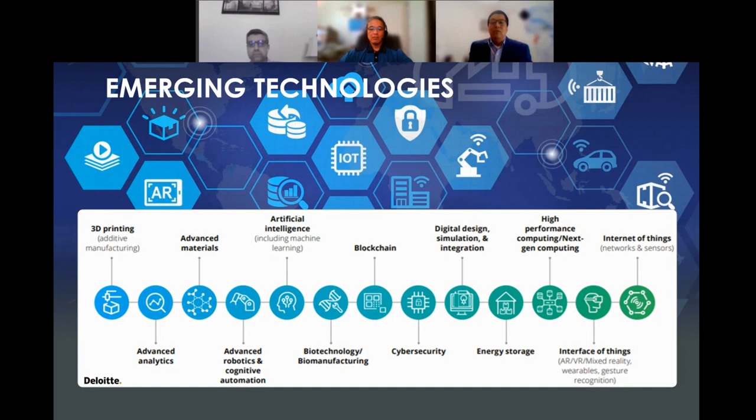This screen shows a recent report from Deloitte. The report speaks to the fact that new and emerging technology trends will change the industry. This is evidenced through many point solutions coming to market that focus on industry trends such as AI, IoT, or 3D printing.

These point tools have accelerated the use of some of the emerging technologies for design. However, they are point tools and remain disconnected from the design process, leading to data silos, broken processes, and lost data. But what if you could harness emerging technologies such as AI, IoT, AR, additive manufacturing, etc., within your existing design environment and tools?

Well, you can. At PTC, which is why I'm so excited to be here today, we are taking these latest technology trends and deeply integrating them into your design environment so that you, as a design engineer working in your everyday CAD tool, can use them freely. PTC is the world's innovator of commercial 3D CAD, and we are now leading a renaissance of industrial design by delivering these integrated technology trends in Creo.

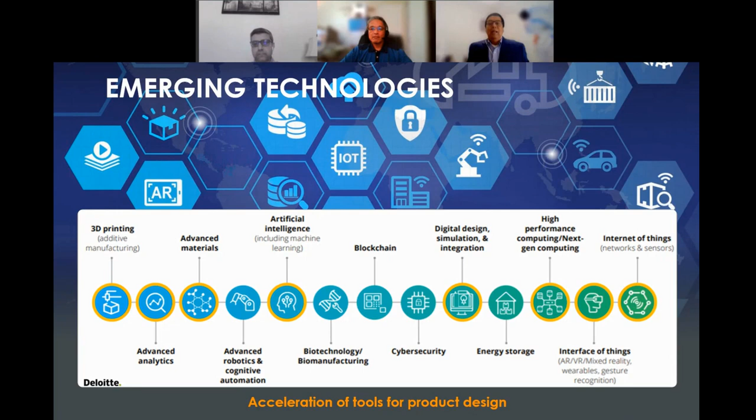Let me show you what I mean. At PTC, we're working on these 5 major areas, which happen to map very, very well to the major emerging technologies that Deloitte has outlined and that we know are critically important to you.

I want to point out 2 really key things. First, we are not introducing point solutions. We are implementing and improving these areas directly into Creo. They will be integrated and be part of your existing workflow.

Secondly, Creo scales across the supply chain. We can provide this technology not only to the manufacturer of an exhaust system, for instance, or any T1 or T2 supplier, but also to the major OEMs themselves. Creo is unique in its demonstrated market success in handling that kind of scale. Creo is the only industrial design tool capable of scaling and supporting at this level.

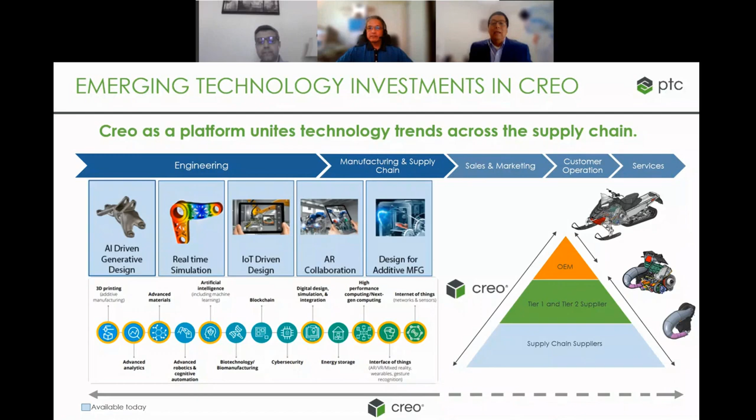And we're taking it to the next level by augmenting the already robust functionality with the integration of this new technology. So let's go one by one.

Taking a look at generative design. Generative design automatically generates optimal designs from a set of system design requirements. It brings together advanced analytics, artificial intelligence, and multi-physics simulation to automatically evaluate and evolve numerous manufacturing-ready design combinations that meet the design objectives, whether that is for additive manufacturing, milling, forging, or mold. Generative design will help challenge assumptions and deliver high-quality, lower-cost, manufacturable solutions.

As we move across the workflow from generative design, we come to real-time simulation next with ANSYS. This enables not just powerful simulation to be conducted, but to be conducted as part of the design workflow. PTC is the only exclusive partner working with ANSYS that can bring this capability into the design environment. Everyone else has to utilize the same disconnected, siloed workflow where data handoffs are required, not with Creo and ANSYS.

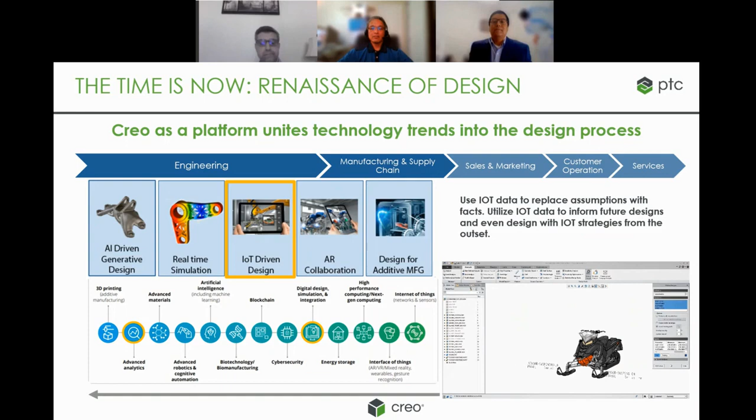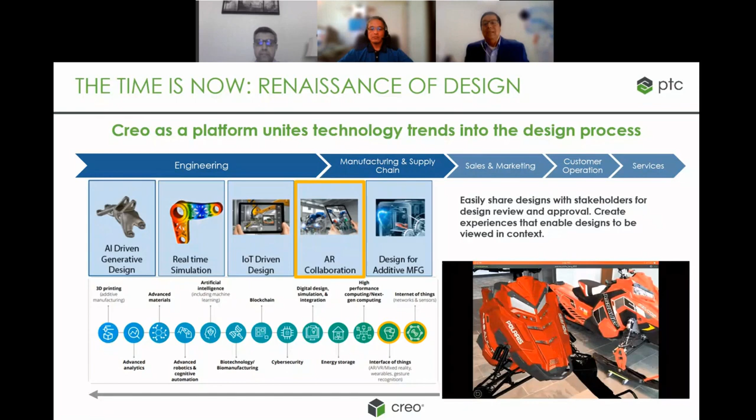Next is AR collaboration. With Creo, I'm able from within the design environment to quickly and easily produce AR experiences that enable stakeholders to not only visualize, but experience the design. You can easily share all your designs with stakeholders for design review and approval, creating experiences that enable designs to be viewed in context.

Creo as a platform also connects from engineering to manufacturing. Seamlessly design, optimize, validate, and run a print check all in one environment, enabling you to easily bring designs from a virtual product to a physical product. Now within Creo, you can create your tray assembly, place your parts or components, nest them, and send them to the 3D printer.

Now that we've covered the trends and how Creo is being improved, let's look at a very important enabler to design for manufacturability. Thank you, Jose.

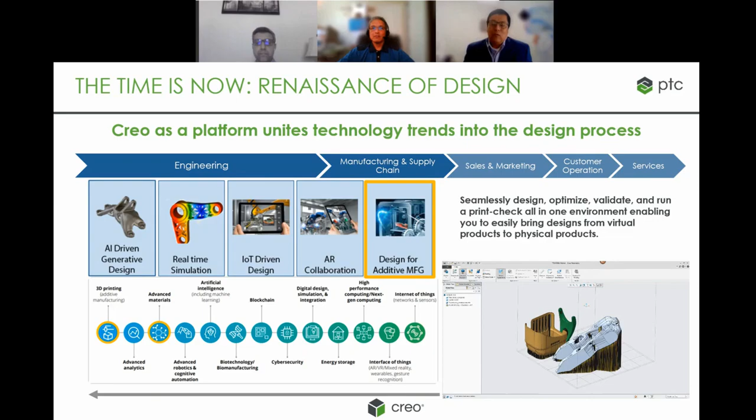I represent HCL. HCL is a world leader in engineering R&D services and solutions with over 150,000 employees and about close to $10 billion in revenues. It's a privilege for us to be the engineering partner of majority of the global top 100 product companies, representing almost all the major industry segments.

Our products and solutions help our customers in their digital transformation journey. You heard Jose talk about some of the trends in engineering, and one of the major implications of that is increase in product complexity. We see this challenge manifest across almost all our customers as global competition continues to intensify and the pressure to differentiate increases. Products are being made more and more smart and connected, and that continues to increase the complexity.

There was a survey done by engineering.com of leading manufacturers, and it came out that the number one reason products are becoming more complex is because the mechanical designs are getting more intricate. As miniaturization happens and as you pack in more electronics and software content into these products, eventually your mechanical designs need to be able to accommodate, and that increases the complexity.

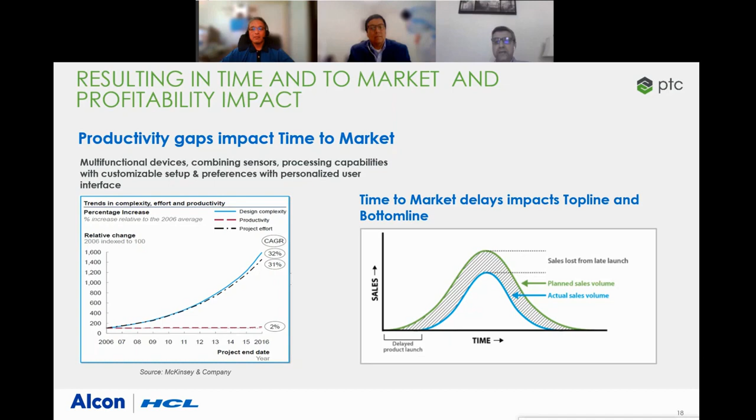To address this, design teams have to increase productivity and eliminate waste.

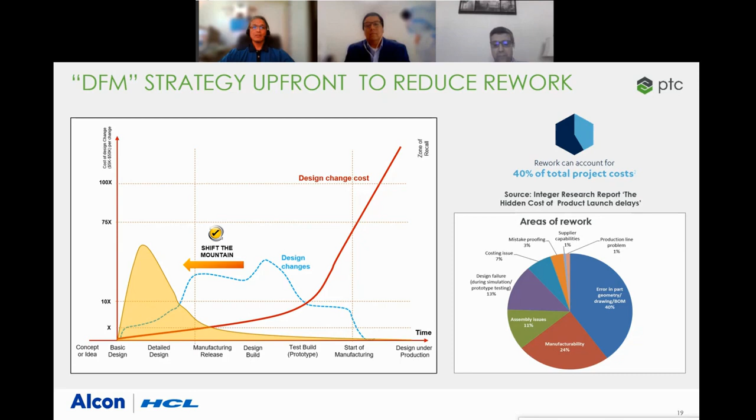Now, reworks themselves can be due to many different reasons. Our survey and research shows that typically about 35% of the rework can be due to manufacturability or assembly issues. That's basically design for manufacturability or assembly issues. And addressing them upfront during the design has tremendous benefits. Companies are realizing this, and they're adjusting their operational processes to handle many of the DFM, DFMA issues upfront.

Now, the traditional approach, though, which is usually manual, is fraught with challenges and is not very scalable. For one, since there are hundreds of checks in DFM, there's always a chance that some of the key checks may get missed out in the manual process. Secondly, there is no closed loop to capture the learnings from the rework systematically and incorporate them for future validations. And finally, in the new normal that we all live in, with more and more remote working, lack of proximity will be a challenge.

Therefore, the solution is a software-driven approach in an easy-to-use CAD integrated environment. You heard Jose talk about the need for a single integrated environment for handling the product development process. Now, the automated approach saves time, ensures that all key DFM checks are completed upfront. And since it's in your native Creo environment, it's easy for designers to learn and use. HCL's DFMPro software is proven across many industries and leveraged by designers as a digital assistant to help design with confidence and design right the first time.

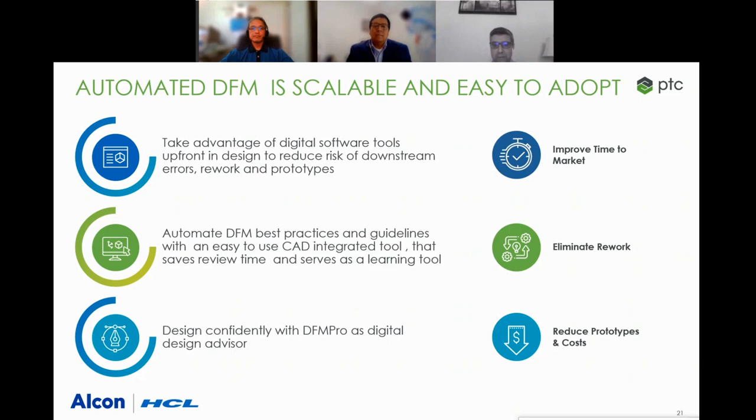With this, I'll hand it over to Alex. Alex is from Alcon, and he'll talk about how Alcon is leveraging Creo and DFMPro upfront during the design process and reaping the benefits. Over to you, Alex.

Thank you, Nambi. Before I jump into discussion about DFM, let me tell you a little bit about Alcon. At Alcon, we develop innovative products to help people see brilliantly. We are the largest eye care device company in the world. We work in 70 countries and serve patients in more than 140 countries.

Our leadership is driven by cutting-edge innovation and breakthrough technology, transforming the way we treat eye diseases and eye conditions. We have the widest array of eye care offerings in the industry, with products organized into two businesses, surgical and vision care. Driving innovation is the key to our business, and we have a history of launching new products to market for the first time, driven by strong R&D.

So when we talk about strong R&D, it also means keeping up with our own innovation. As a company, we share the same challenges for developing products as the rest of the industries, such as driving innovation to ensure product differentiation, contending with today's product complexities, meeting milestones, onboarding of new engineers, or just keeping up with the ever-changing regulatory landscape. To be at the cutting edge of product development, you need to have the right tools, people, and processes.

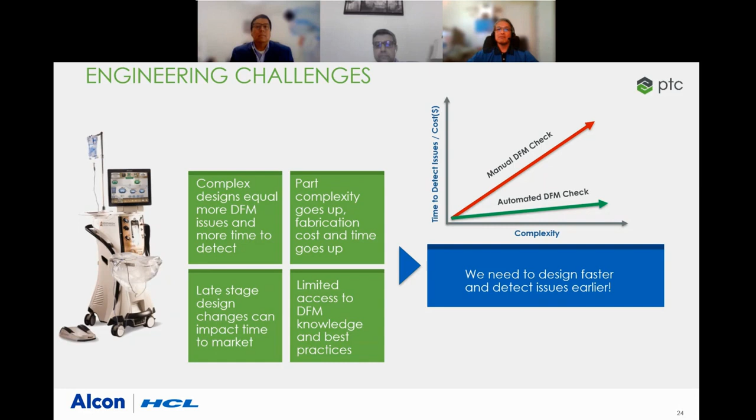But as Nambi points out, the traditional DFM approach has its own set of challenges. Manual reviews are very time-consuming. There's a lack of knowledge and best practices available, and it's often difficult to locate these company DFM guidelines if they even exist. But what would it mean to have a design advisor recommend fixes based on your company's guidelines while you design? But let's first answer the question, why is DFM critical and why do we even care?

Well, what about cost? Reducing cost without reducing performance. For example, minimizing part count, standardizing parts and materials, designing parts for loose tolerances, creating modular assemblies, streamlining the number of operations in the manufacturing process. As you know, the cost of engineering change is exorbitant during production, which may lead to rework, which may lead to delays. And delayed product launches have a direct impact on revenue and bottom line, including loss of market share.

And knowing supplier capability and ease of manufacturing ensures good part quality that is easy to manufacture at a competitive price. Tolerances impact cost for manufacturing, and DFM highlights the risk of using such impossible to achieve tolerances for the manufacturing process. What about safety and efficacy? We must consider selecting materials for cleaning agents, fire retardants, and even water ingress. So, as you can see in the graph to the right, the time to incorporate these DFM measures manually is significantly higher as time goes on.

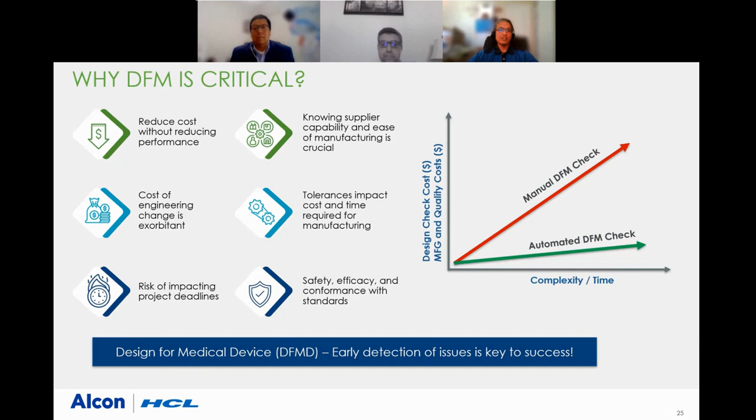But if we can automate this check process while we are designing, we could drastically reduce time and cost while increasing quality and getting it right the very first time. So how can we automate the DFM check process with our Creo platform? The answer is DFMPro, an add-on Creo application for manufacturing. So let's go see how this is done.

Also, as you can see, we use Creo as our design platform. It allows us to visualize the final product before steel is even cut. It allows us to create virtual parts and assemblies that make up the subsystem within our product, communicates design requirements to cross-functional design teams that all can see, and provides the capabilities and design tools to support all cross-functional design teams. DFMPro is an add-on that is directly integrated inside PTC Creo Parametric, adding manufacturability to our design platform.

And with just a few clicks of a button, when we are designing, it activates the Design Advisor. It's also linked to Windchill for DFM traceability. It also helps stage models for more expensive analysis like mold flow simulation, or even helps start conversations with your vendors at the beginning of your project.

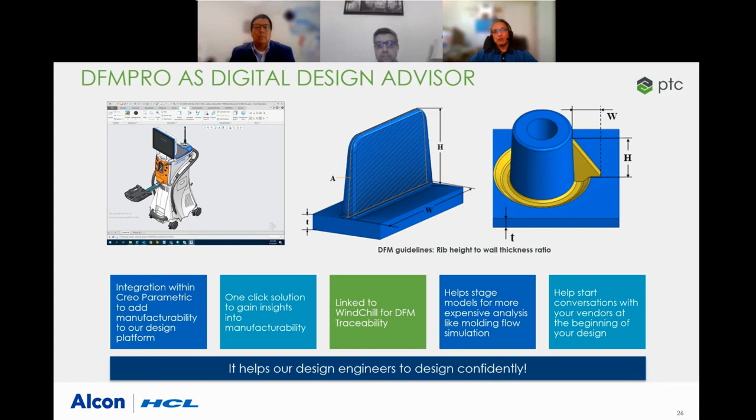Now, let me show you how we use it with an example. So open a part in Creo. Here's a plastic part, and Design Advisor is activated to provide recommendations while you model. Just input the parameters and go. We have an option to analyze the part after modeling is complete, where we select the company guideline for this material, fabrication process, and click OK.

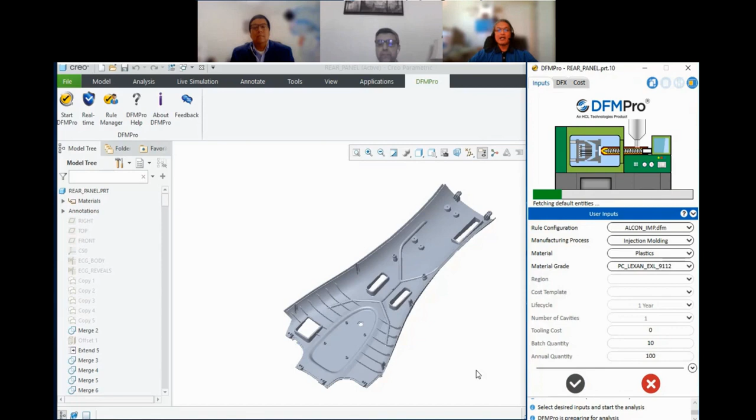Design Advisor will now select the pull direction, and all we need to do is input the material wall thickness desired and click OK. DFMPro is now comparing the part against each company's DFM guidelines for plastics, as you can see here. What is nice is now company guidelines are available for all design engineers, regardless of location, and now company guidelines can be updated in real time.

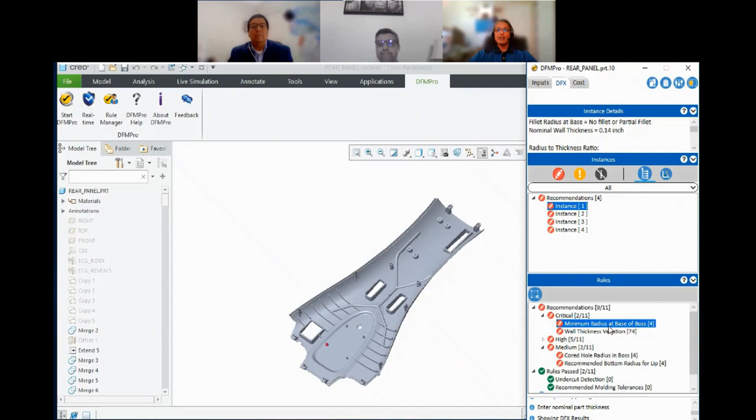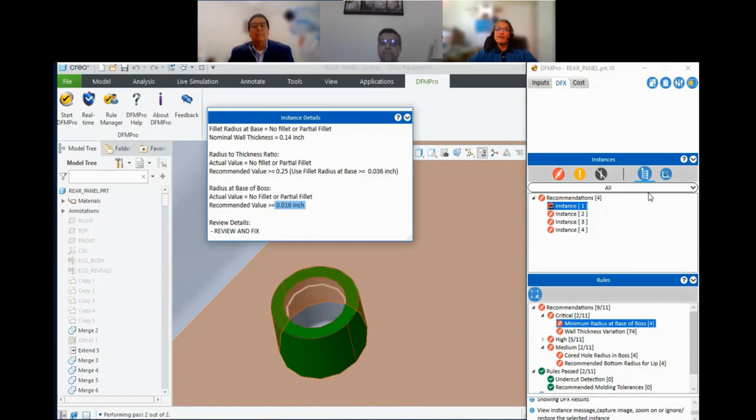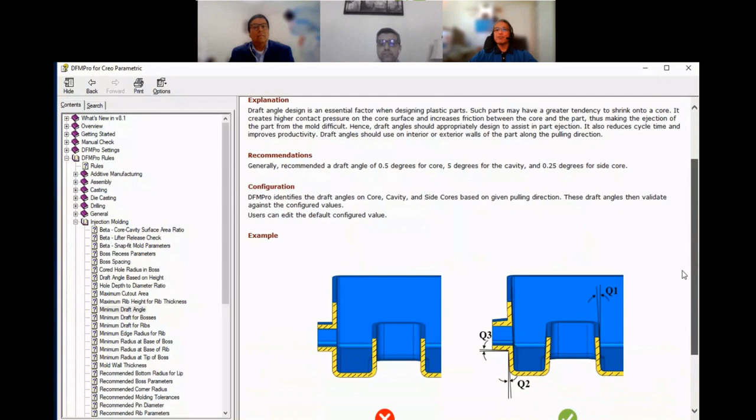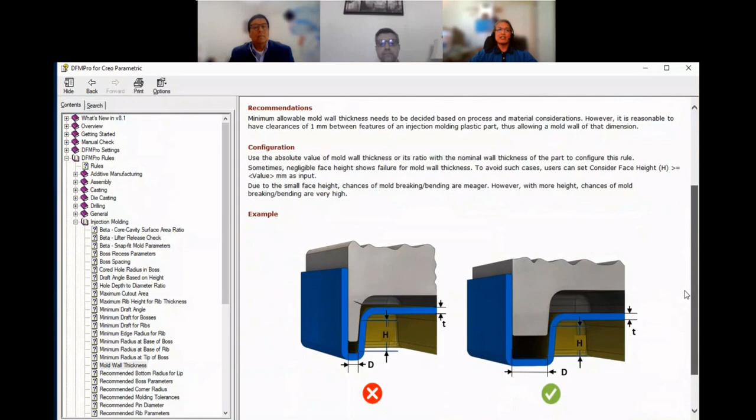DFMPro also has a help menu that directs you to the content to give you further explanation on this specific rule and examples. Here are a few other rules, like minimum radius at tip of boss with examples, or minimum draft angle with an explanation why draft is important and the recommended parameters for core, cavity, and side core classifications, or wall thickness where two walls are too close, resulting in thin wall conditions that can affect the quality of the part and reduce the life of the tool.

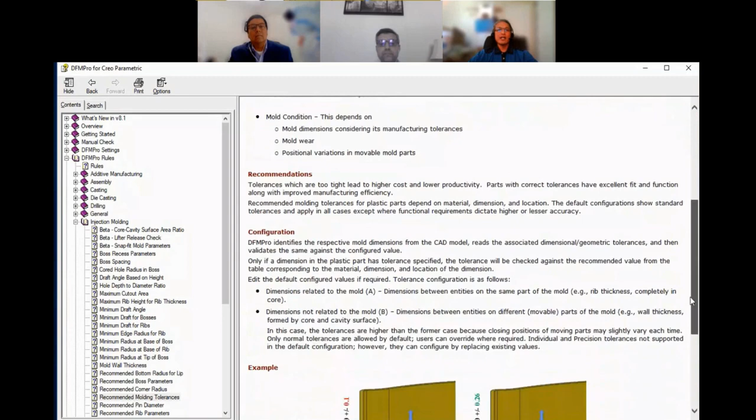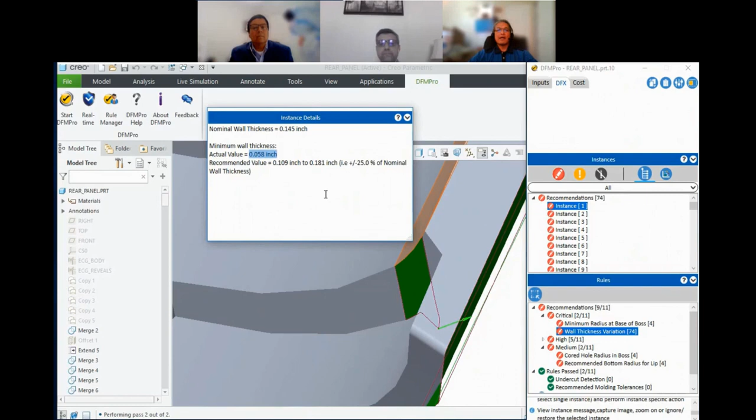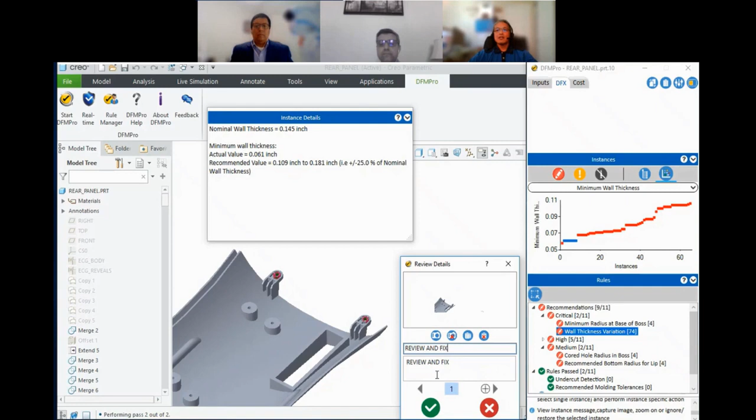I can also go to the scatter option and select multiple areas for analysis, and the Design Advisor highlights all these areas in Creo, which now allows us to add comments for the same issues all at once, saving us time. And now that we are done analyzing the results, we can go and create a report that will include all the recommendations and all the comments that have been inputted. Select the reports and click OK.

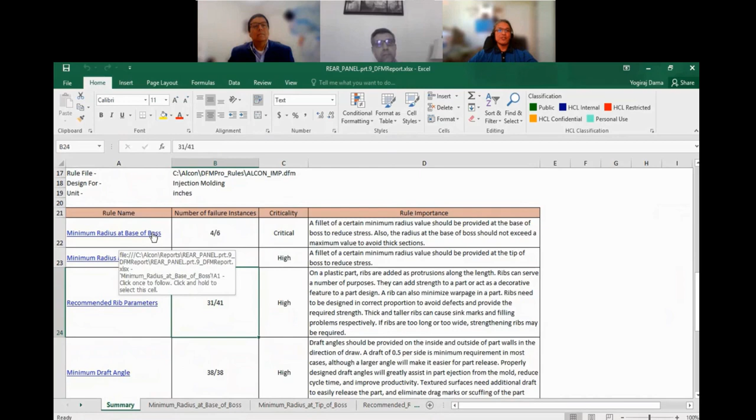Here is the Excel report with the company logo and list of rules analyzed. Let's pick one of these guidelines on this report, and we can see the recommendations for the guidelines, the actual values versus the recommended values, the comments we inputted during the analysis, including the associated image for these comments. We even have a section where we can provide action items, status, and additional team comments.

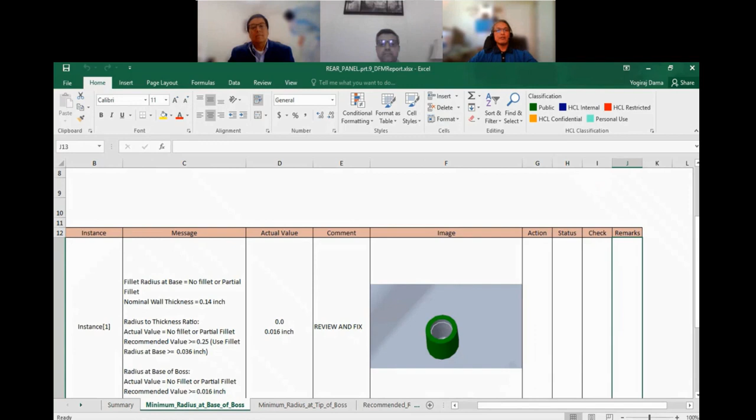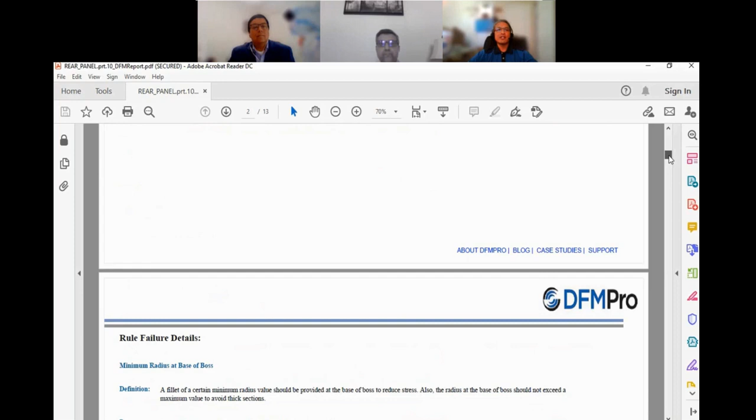The second report is a quick PDF report highlighting the part being analyzed, when it was created, who created it, guidelines being used, fabrication process, results summary, number of recommendations and their importance, and a summary of each general guideline with part images.

That is DFMPro in a nutshell. Imagine all the time savings identified. A design advisor that identifies and recommends advice based on your guidelines that you can act on. Centralized guidelines of the latest company standards deployed company-wide. Tools for commenting, on-demand help, and DFM reports that organize the recommendations and comments in an Excel report that can be used in a design review, with no more time-consuming manual creation of reports. Simply doing more with less.

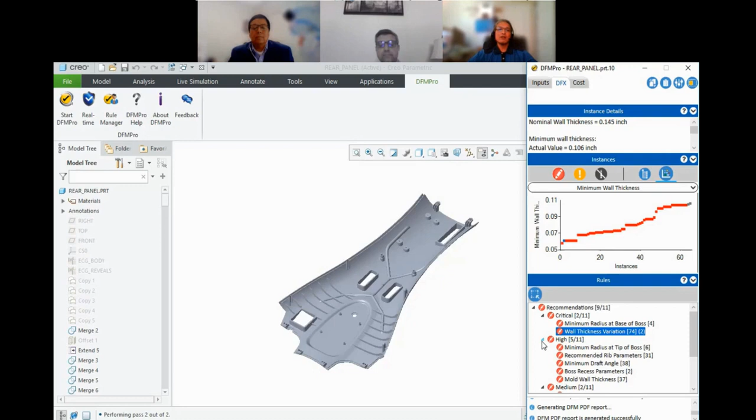In summary, having a platform like Creo, allowing stakeholders and teams to visualize the end product, communicating the design requirements, providing the tools for the design teams, coupled with Windchill for design traceability in one working environment, gives us a winning solution for designing faster with design traceability. With Creo as a platform connecting to our manufacturing solution, DFMPro, we now have a winning solution for reducing costly design changes and reducing and possibly eliminating rework downstream, ensuring projects stay at a fast pace while reducing the worries of having downstream issues going into production.